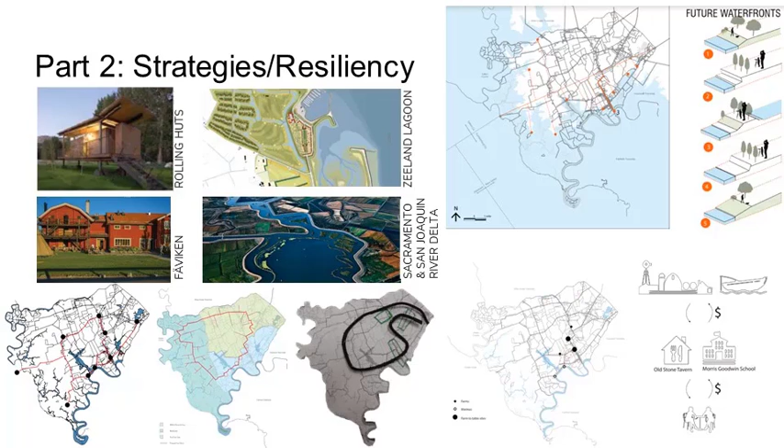Culture Craft aims to connect different zones in Greenwich through a new perspective that would be not only recreational but resilient. Through our investigation, we identified five major zones and defined them as gardens: the Memory Garden in Othello, the Water Garden in the Historic District, the Marina Garden in Pine Mount Creek, the Marsh Garden in Bayside, and the Farm Garden in the agricultural area of Greenwich.

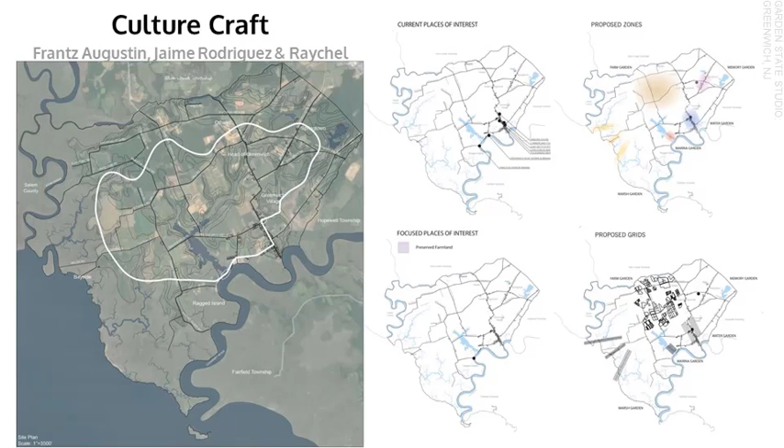A central trail connects these zones and functions as a passageway for pedestrians and bicyclists to experience Greenwich in a new way. In parts of the historic district and by the marshland, the trail serves as a levee that protects the town from floodwater in the event of a storm and the incoming 100-year flood level.

A rain garden is situated on both sides of the historic district in order to help mitigate excess water and keep it from running into the village.

By the Marina Garden, the path acts as a floodgate to control the amount of water coming into Pine Mount Creek from the Cohansey River. By the marsh, a community of floating cabins is organized to accommodate tourists and provide access to the waterfront.

The farm and water garden work together to incorporate an economic resilient strategy by developing a farm-to-table style restaurant that would be located in the historic district and source all their produce and crops from neighboring farms.

The Memory Garden acts as a museum where African American artifacts can be displayed in honor of the Underground Railroad that would pass through the Bethel AME Church located in Othello.

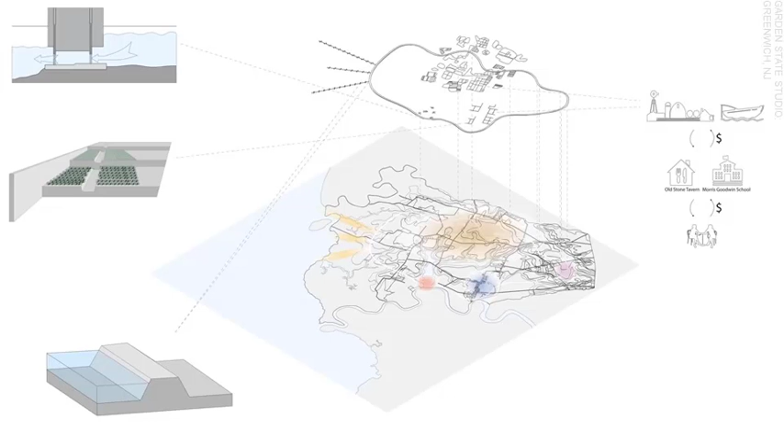These images show how the path acts as a loop and would be flexible as it transforms from an unelevated recreational path to an infrastructural component for resiliency.

Shorescaping is the practice of anticipating future water levels and preemptively designing the infrastructure necessary to protect coastal communities in the present. There are benefits to working on dry land before it's underwater, and by integrating future infrastructure needs and amenities with current infrastructural improvements, we can enhance and protect our investments over the long run.

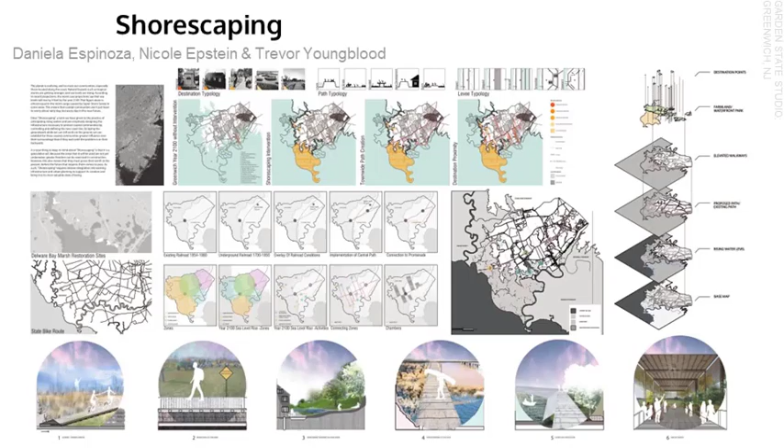In shorescaping, we look towards the future in the year 2100, where we conservatively predicted the water level would rise about 5 feet. This modest projection submerges almost one-third of the land in Greenwich, encroaching on farmlands, threatening local landmarks, fragmenting infrastructure, and establishing new shorelines.

In order to preserve the vital past and capitalize on the emerging future, we proposed the creation of a central path to serve as a backbone for the town. This path, using existing roads and creating new paths along existing property lines, would create a new pedestrian artery through the town to the new shoreline.

This central path would be intersected by a series of paths that would create chambers of different landscape types from the bay to the upland.

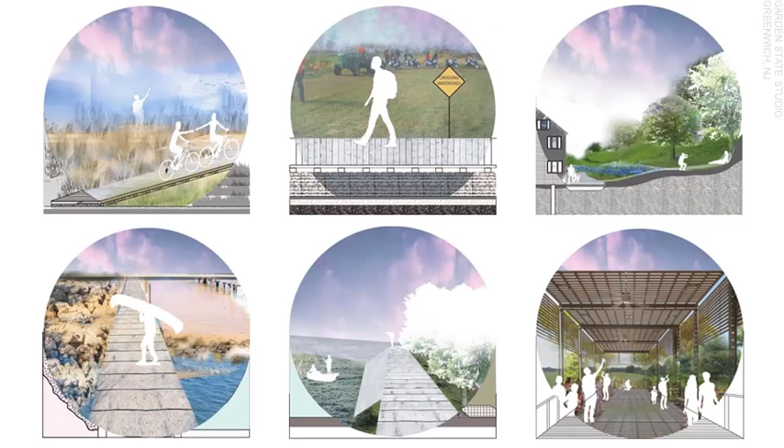These smaller paths are coordinated with existing and future landmarks and areas of significance, and would offer an array of recreational, historical, and educational opportunities. On these paths, one could bike through the marsh, walk along the levees, learn the local history, launch a kayak, and do much more. Our group primarily focused on the interactions between people and water.

We define these moments of interaction as portals. Each project in and of itself aims to be a portal or access point that connects people with the riverfront, whether it be on the water or by means of an adjacent pedestrian path. The sites of these portals are historic sites in which there was a previous interaction with the water.

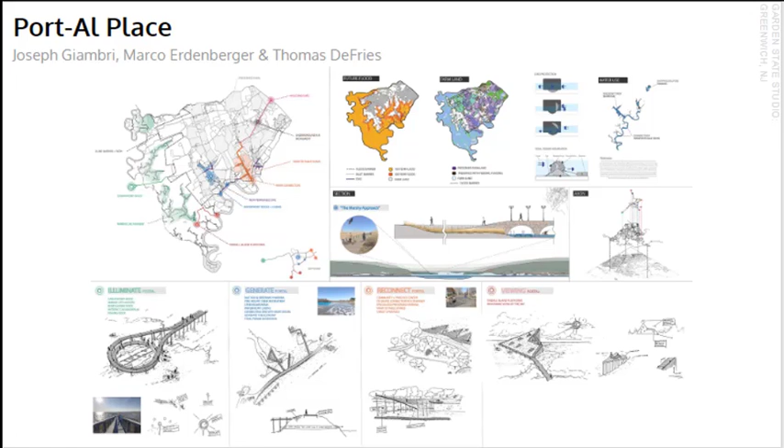These interactions included shipping, fishing, harvesting, and general access, as well as resistance in the form of levees. With the use of portals, we aim to create a network that guests can use to see all of the points of interest in Greenwich, while experiencing the most important aspect of the town: the water.

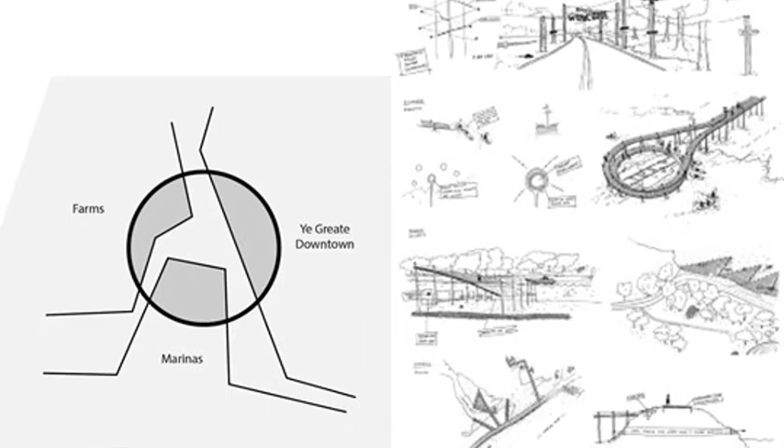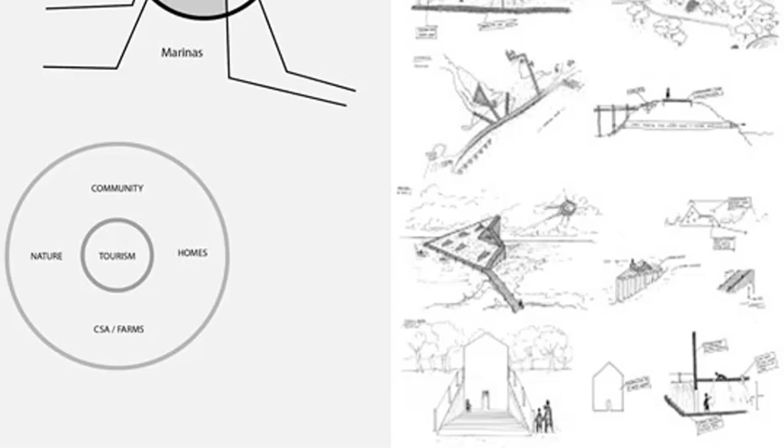The portals connect via a kayak network that begins at the end of Ye Greate Street and ends at Caviar. Along the way there are a variety of portal types, from the new pier into the Cohansey to a historic Underground Railroad portal. There are areas of resiliency along this path as well. A new dike is proposed to span Pine Mount Creek with an operable gate to allow tidal flow. This network will have access to all of the portals along the waterfront, making it easy and convenient for guests to visit them.

Portals, as our group defines them, are arrival and departure points into the water, waterfront walkways that visually connect the land and the water, and navigational systems between different bodies of water. Port-Al Place attempts to introduce recreational resiliency, infrastructure, hospitality, and ecotourism to these sites. The projects are located along the Cohansey River and provide the town with social and physical resilience. Even as water levels continue to rise over the next century, they will help to develop a new typology of tourist economy, as well as providing resiliency and highlighting the uniqueness of the town.

Our studio's last strategy is called stratustilting. Stratustilting understands the horizontal and vertical stratums as one moves through the different environments on the site, like the wooded uplands, the farmlands, general waterfronts, and thick marshes. Stratustilting begins to provide stilting solutions with an initial 10 points, or points of interest, along a series of pathways.

Stilting takes on the act of using elevated structures as a way to not only avoid the effects of rising water, but provide views and additional spaces for activity. Elevated structures or towers can include housing, recreation, leisure, and educational spaces. By modifying the height, width, connection, and form, stilting allows for many design opportunities.

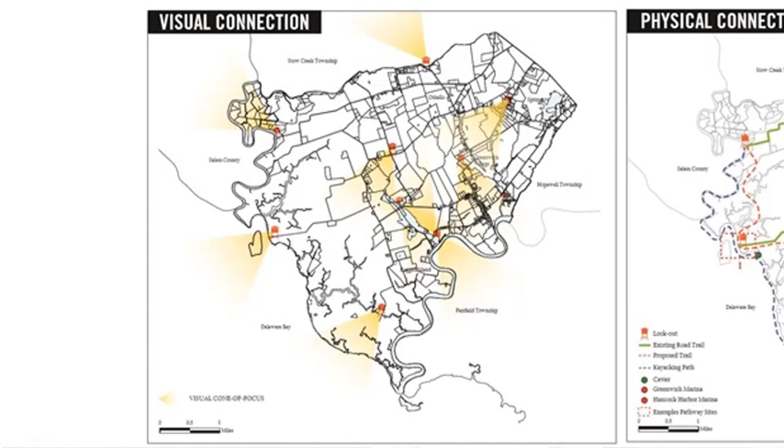In stratustilting, as one ascends a stilted structure or tower, a person can make a visual connection with another tower in the distance. The map on the left shows where some of the viewpoints would take place, looking outward and inward. Highlighted in green, stratustilting interacts with existing roads as a way of connectivity, but also proposes ideas of bike and hiking paths. It would be useful to think of elevated pathways that one could walk on as they travel throughout the town.

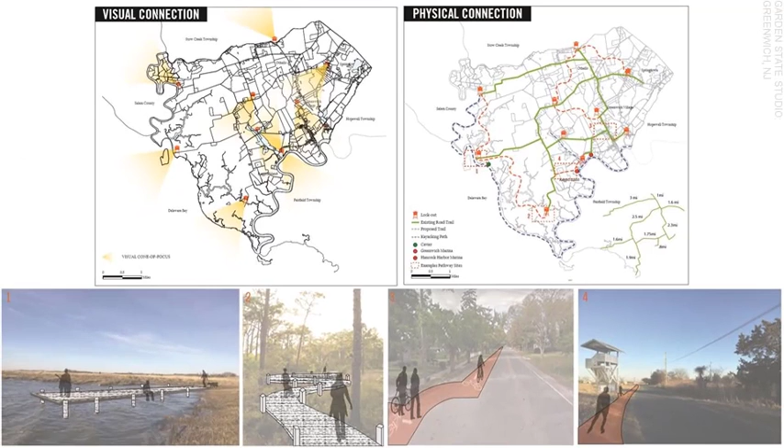We recognize the different environmental zones of a coastal community and how the stilted towers are placed in varying areas. Moving inland, we start off from the lower marsh to the upper marsh, the expanses of farmland to the tree-dense uplands. Our tower examples would exist in a variety of environments, serving different environmental, economical, and educational value. By raising our pathways and structures with stilts, we avoid rising water. Our strategy acknowledges that a new waterfront would exist in the future, so our stilted pathways would connect the old to the new, in addition to some of the proposed towers on the bayfront.

In this resilience strategy part of our semester, each team incorporated the following criteria into their proposals: a clear, organizing concept for experiencing Greenwich; acknowledging, measuring, and responding to sea level rise; providing new ways of accessing the environment, the landscape, and recreation; new connections to economic opportunity; the idea of low impact construction and landscape interventions; revealing the true nature of the place; and finally, each strategy included a proposal for infrastructural investment that could become the foundation for next phase architectural design.